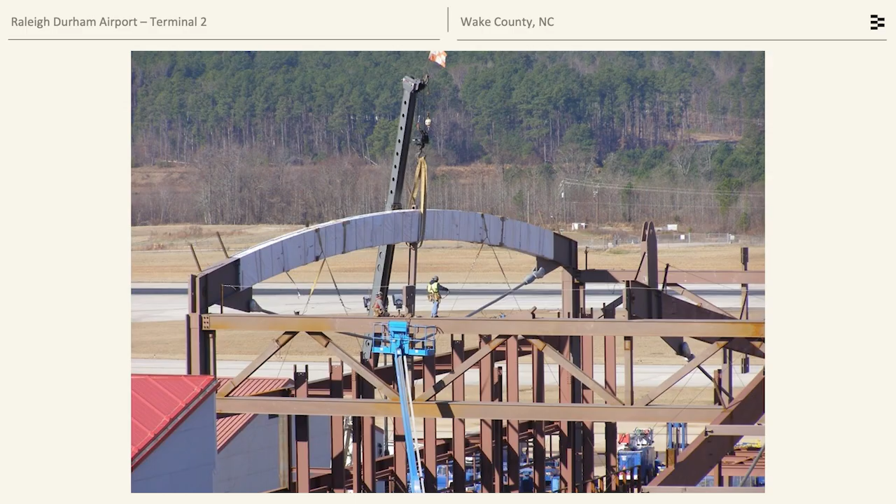Maybe. All right. Where the steel vertical post meets the glulams there, it's a very sensitive connection. A lot of different forces happening there. Really difficult connection to design. The engineer of record on this project had actually designed the whole thing, including the connections. That was their design on the left. It probably would have worked structurally, but would have been extremely difficult to fabricate and to install.

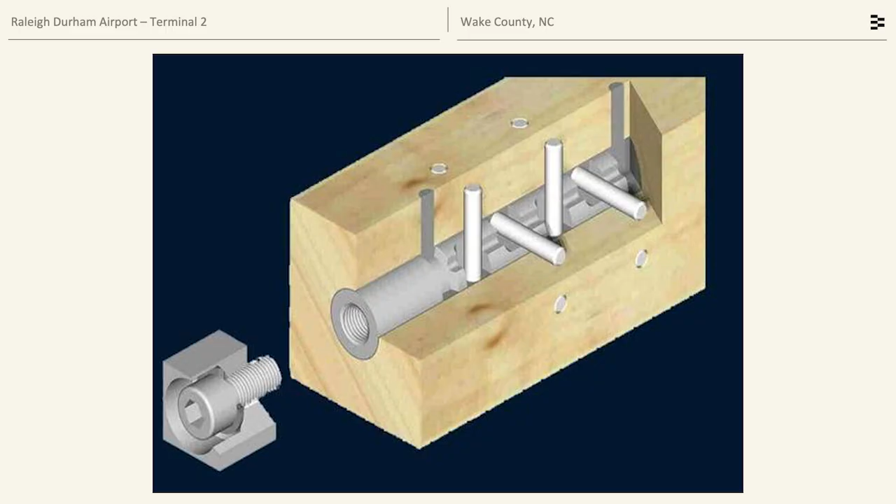And we got brought into this project as specialty engineers to help redesign these connections. We brought in technology from Europe, which was called the Bircha connector, and redesigned these connections with that. This product didn't have any approvals in the US, so we had to oversee a $200,000 testing program to prove that it worked. And after we did that, using these connectors, we saved $1.5 million on a $7 million timber package. So one thing to know about timber construction is there's a lot going on in these details, and there's a lot of opportunity to optimize these details and still develop something that totally meets the aesthetic goals of the project.

Adohi Hall is a university project. It's a residence hall at the University of Arkansas, 5 stories. And the importance of this project is that it really showed that mass timber can be built in the South competitively on cost.

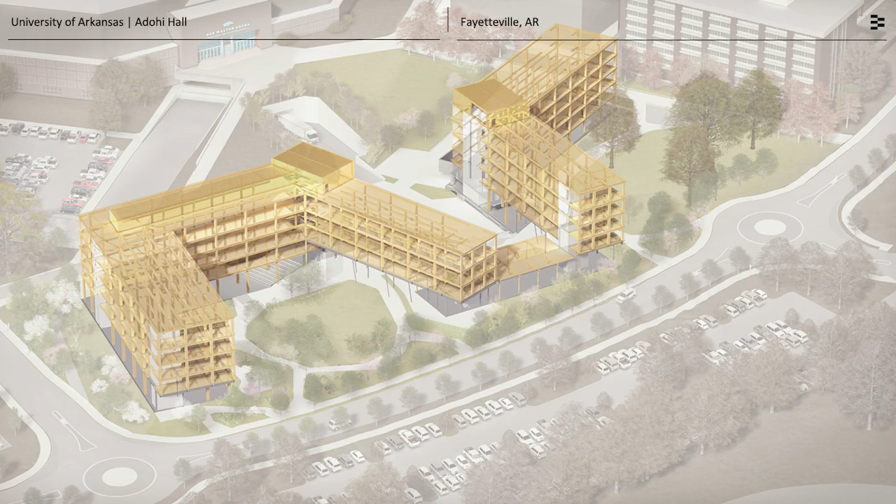This is actually in the, Laura, what's the name of that document? Business Case Studies for Mass Timber by Woodworks. This is one of the case studies. A very small premium to build this in mass timber as opposed to conventional materials, but they're getting something like 25% higher rent rates in this building.

And so it's a very simple post and beam building, glulam floors, and a little bit of expression here in the common spaces with these nice hybrid trusses. I think this project was completed about 2018 or 2019, so a relatively early one here in the scheme of things.

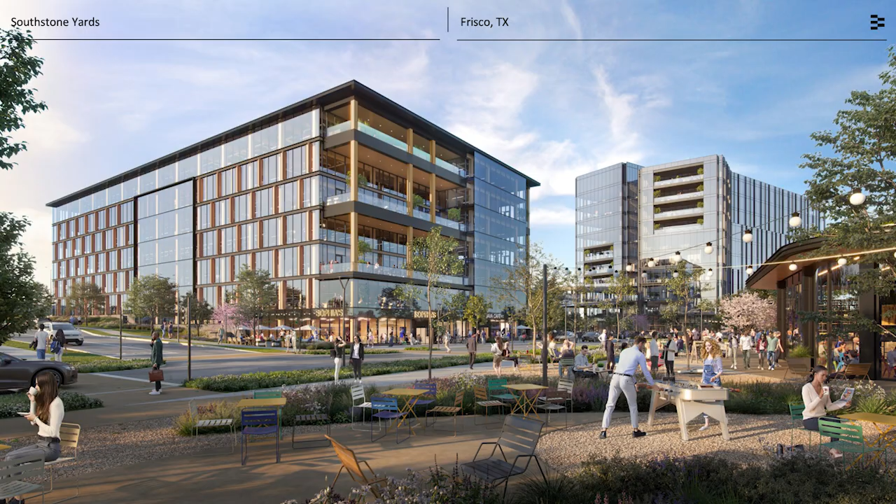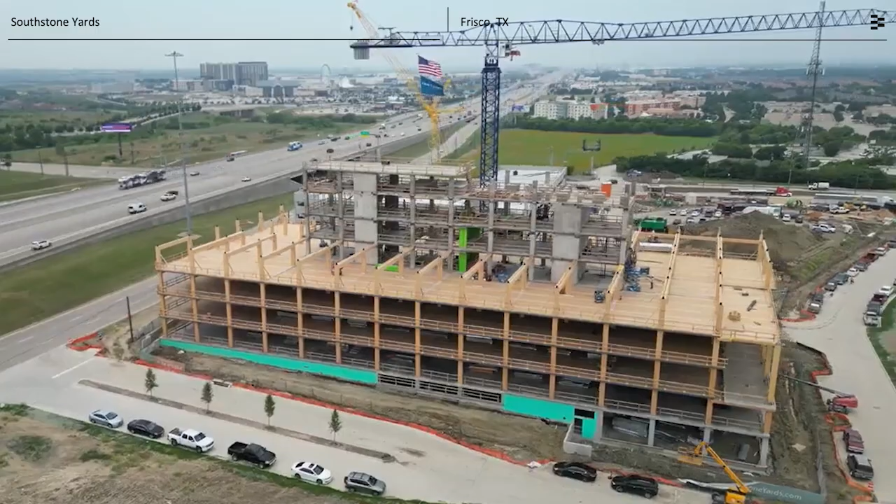Southstone Yards is a spec office building in Frisco, Texas. It's on a campus there. There's another building being designed now. This one was supplied by SmartLam, and we worked with them on the project. So it's a post and beam building. The framing layout in general is very similar to the T3 that's here in Atlantic Station. And you can see what that looks like here in this a little oversaturated photo, in my opinion.

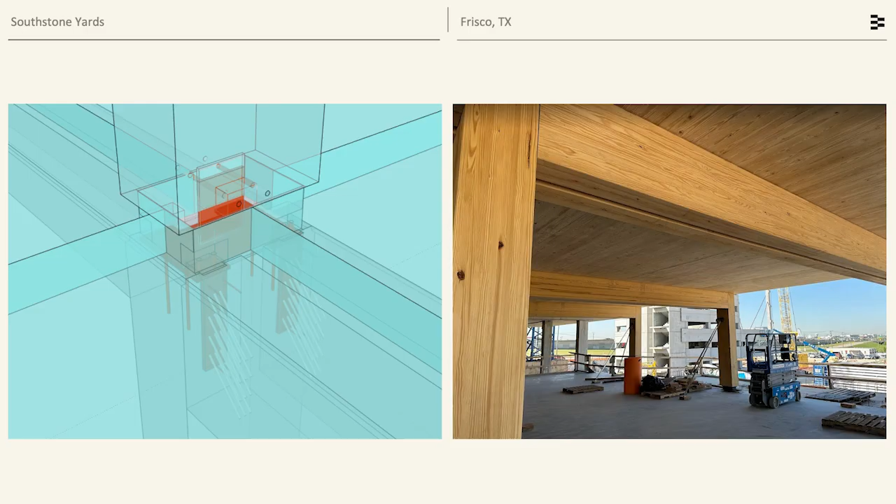Used Alaskan yellow cedar columns on the outside. It's important when you're putting timber on the outside of the building that you use appropriate detailing, use appropriate materials, consider pressure treating and so on. AYC is a great product because it's naturally rot resistant.

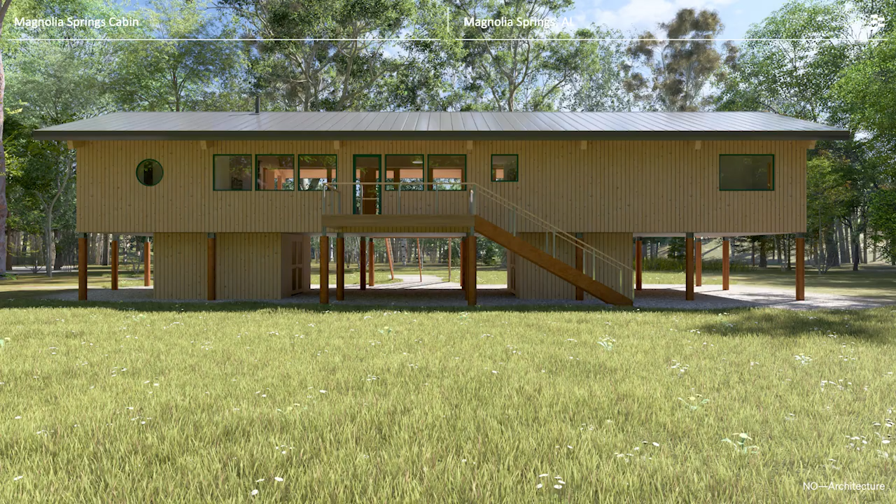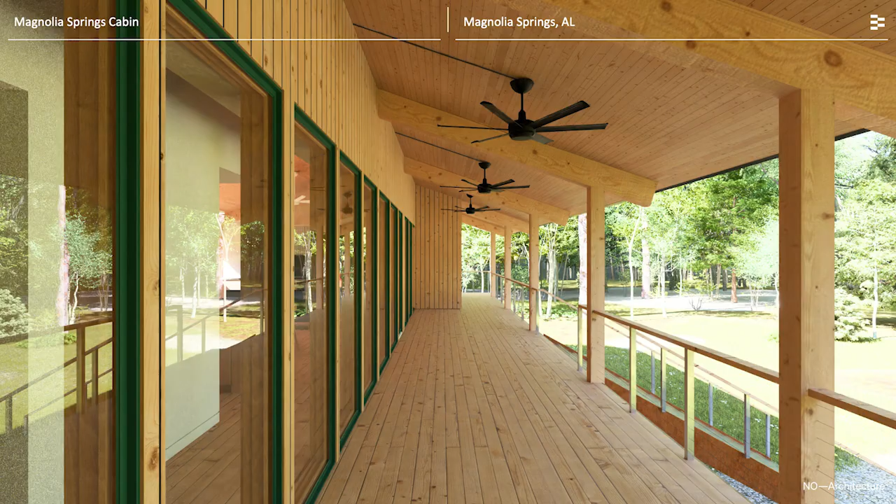So getting more and more current and perhaps a bit closer to home in Magnolia Springs. This is one that we're doing with No Architecture, who's here in the room today. It's a cabin, vacation home basically, and uses, again, pretty simple glulam post and beam frame, CLT roof deck, a conventional floor that's elevated for a couple of different reasons, but just a nice simple project, simply detailed, will be a little bit more expensive than probably if built conventionally, but obviously delivers a unique aesthetic that you can't get with conventional construction.

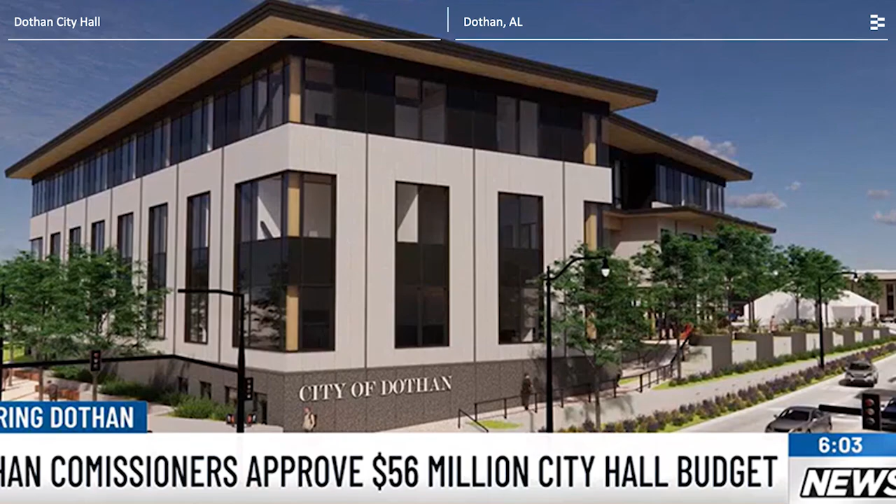Sticking in Alabama here for a second, Dothan City Hall. Of course, Dothan is the home of SmartLam here in the Southeast, so no surprise that we're working with SmartLam again on this one. I probably should have tried to find a better rendering, but I snipped this one from a local news report. And now we all know how much this thing costs. Anyway, 3-story mass timber City Hall, not so different in scale from the one in Brookhaven.

Our responsibility on this project was we designed all the CLT. You can see there's long cantilevers at the roof. There's a point-supported canopy as well. Designed all the connections for all the CLT and all the glulam. And this snip is taken from the cadwork model.

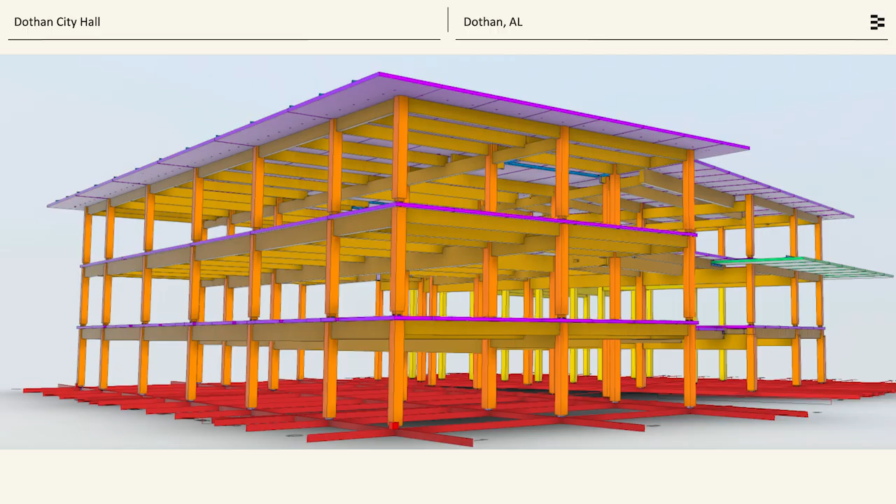So one important thing to know about modern mass timber is that it goes through a digital fabrication process, right? And this is really one thing that distinguishes it from the old school heavy timber, is that you build a fabrication model such as this one, and these models have everything in it. I mean, typically they will have every screw, everything down to millimeter precision.

And then this model is what's used and picked apart piece by piece in order to drive the fabrication equipment that will fabricate all these glulam beams, columns, and CLT panels. And this project just started production now in Dothan. So it'll be built next year.

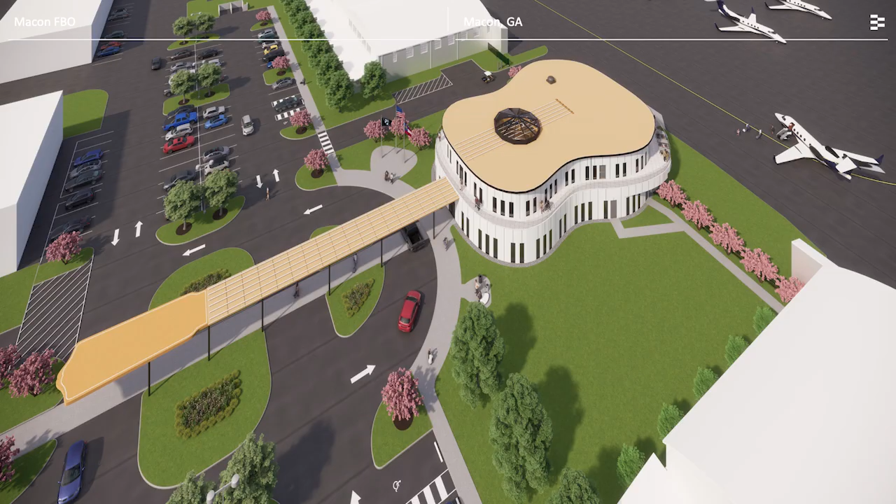The Macon FBO terminal. So I have learned since starting this project that Macon is the home of Otis Redding and also the home of the Allman Brothers. So a pretty significant musical history in Macon. As I understand it, this is basically the front door to Macon for people who are potentially going to come in and make investments there.

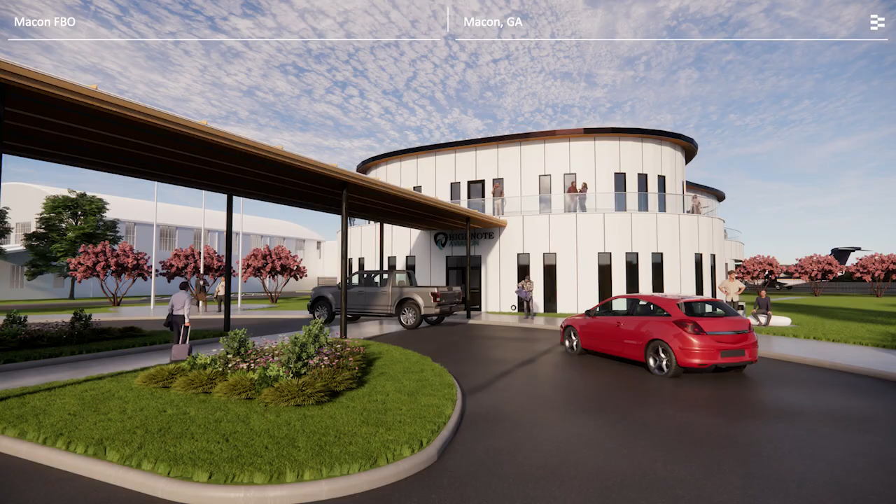It's a corporate airport terminal, so if you have some hotshot flying in that's going to build a new factory or set up a new business in the region, this is where they're going to come in. And the building that they had there was pretty aged and maybe not the best front door for your VIP type folks that are coming into town to make investments. So they wanted to build a new building in order to showcase their heritage a little bit, and they made it in the shape of a guitar.

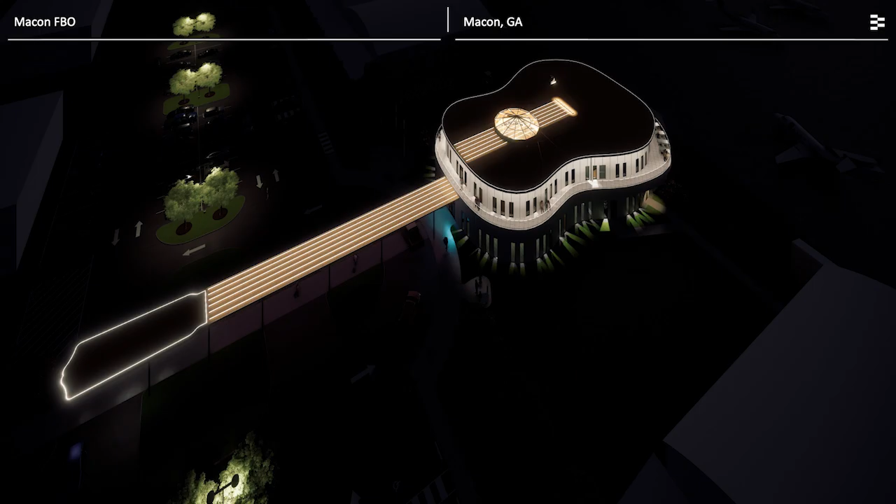And when I first saw this, I thought, no one's going to be able to tell it's a guitar. And they're like, Matt, it's at an airport. I said, oh, right. So it's going to be some really nice lighting, so you can see it at night. This project is in the early stages of construction now. It's not so dissimilar from Dothan City Hall in the timeline, probably in production now in Dothan.

I think one important thing about this project is, we all see all these mass timber buildings that are really nice boxes. And mass timber is not limited to being a big shoebox in form. It's definitely the most efficient way to do it, but you don't have to be limited to that. You can get creative. You can have curvaceous elements like these. You can see how we frame this here with these kind of radial beams.

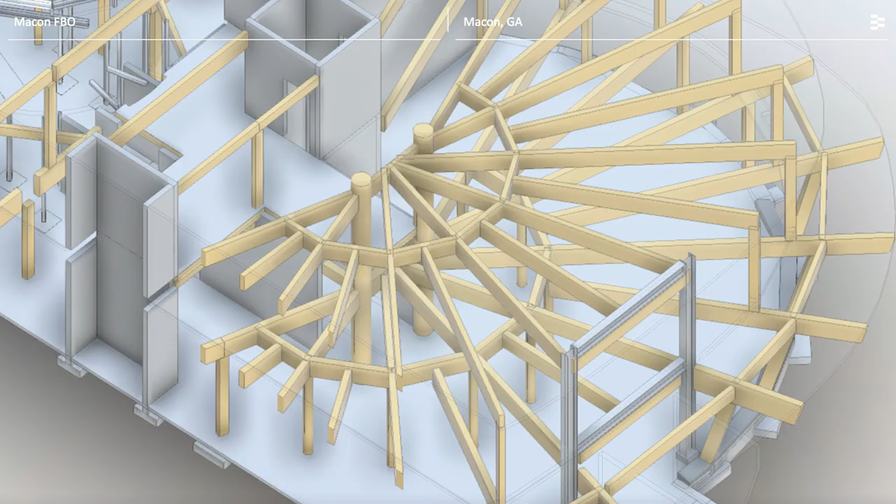And we also have one of my favorite terms, SRT, structural round timber. Sounds really wild. These are logs. And that's what these two big circular columns are here in the middle. Locally sourced, of course. One of the little strategies that we used on this project was, actually I might step back here a couple slides if I can.

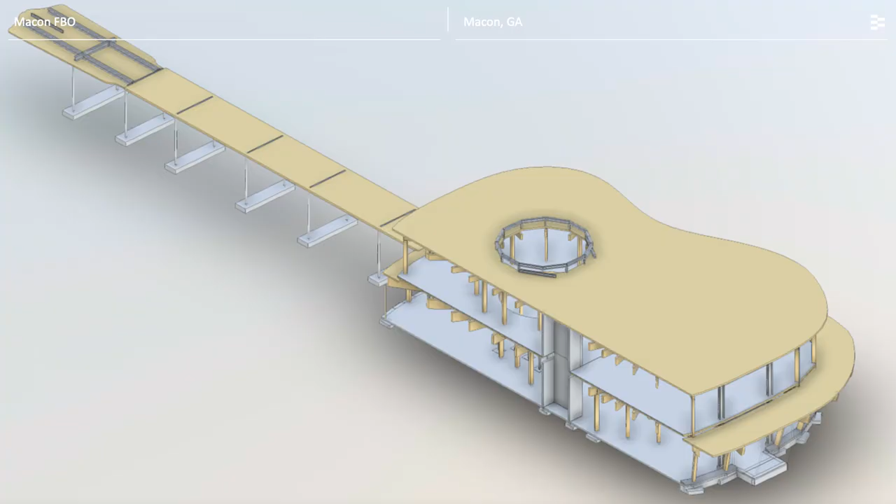Okay. You can see there's a balcony in this cutaway view that wraps around the entire building. We wanted to use the same framing from inside to out. There's a structural step when you go from inside the building to out on the balcony. So what we did was we dropped all the beams and then we put spacers on top of the beams to support the CLT within the envelope. And aside from enabling us to then use the same element inside and out, what that did is it allows us a space to run our building services.

So you don't see any in this image, but you can see how that beam is dropped. It's kind of nice to have the lowest thing, kind of your ceiling that you're really looking at, be a glulam beam and not be a mechanical duct or a run of low voltage cable. So a nice strategy that had kind of two benefits here on this project. This is one key thing about designing a mass timber building is you are not just showing off the structure. You're going to be showing off everything that's up on that ceiling. And so you need to find ways to integrate that in a way that is appropriate for the budget, but also gives you the aesthetic that you're looking for.

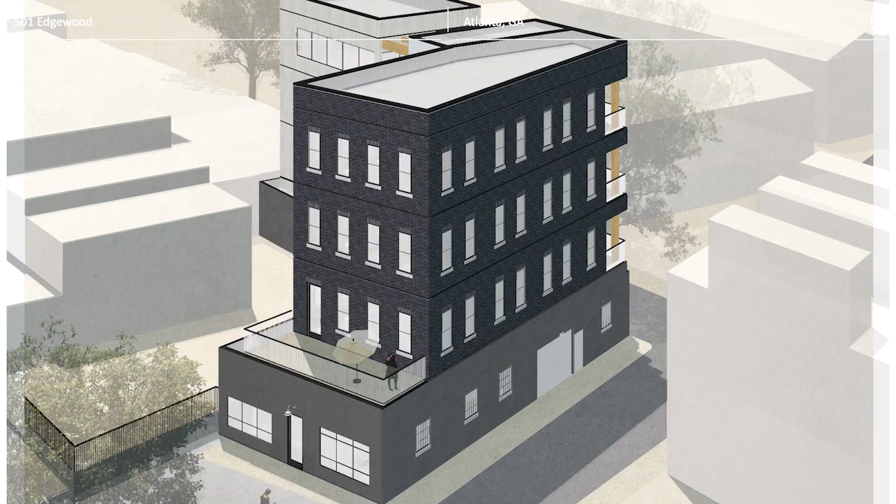Now in Atlanta, this is the project that's up over here by NO Architecture. Got started on this one with these guys. It is a 3-story vertical expansion of what is currently a 1-story block building on Edgewood Ave. It's going to be residential up in these 3-story portions, I think 4 different residences, if I remember correctly. And the idea is to save the building on the first floor and basically do a surgical insertion of the vertical structure that will drop through what is currently the roof. Hopefully stage the construction to keep the coffee shop, which is a neighborhood icon there, I think, operational.

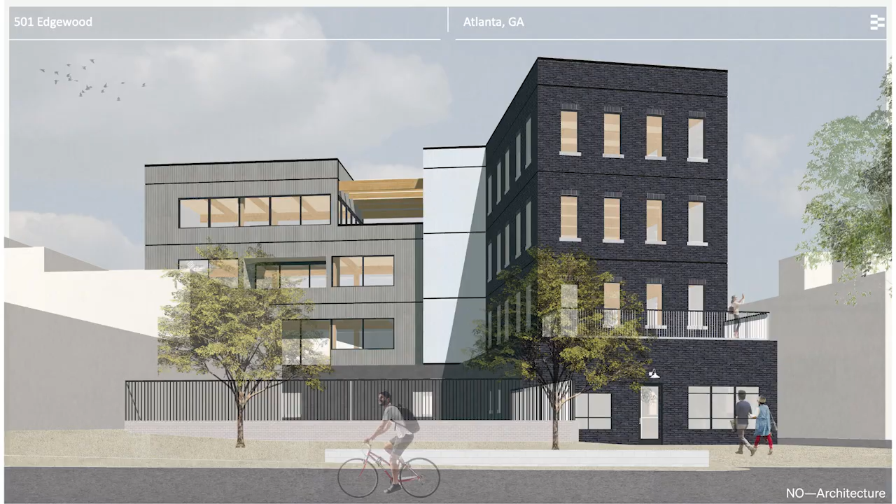And again, it's a pretty simple mass timber frame with some other elements there for lateral support. And that is one of the accelerator grant recipients that was part of the ceremony yesterday. This is one that's an accelerator grant recipient for this year.

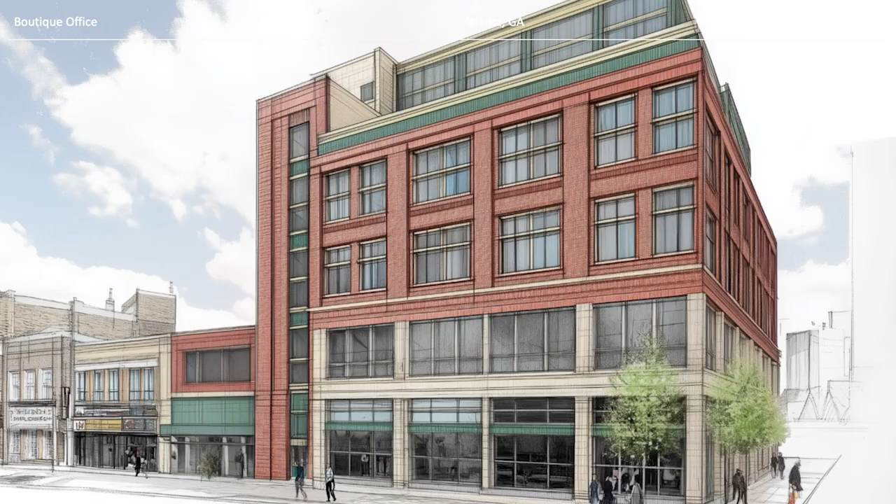This project is in downtown Atlanta on a pretty small, by today's standards, site. I think we have about an 8,000 square foot floor plate. We're going to go about 5 stories with a boutique mass timber office building there. It's in a pretty historic part of town, and so the idea is to essentially make it blend in to the existing building stock there. It's kind of a new approach to what they have, right?

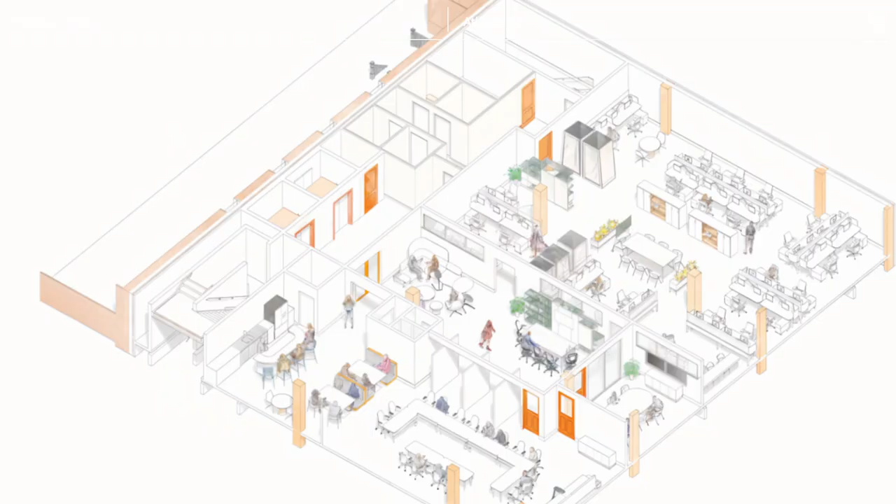But I expect universities are going to keep carrying that torch. Clemson, I would say, is now a timber-first university when they're looking at building on their campus. Auburn is starting to get that way as well. Tech here is certainly interested, but maybe a couple steps behind those other two, and I think gonna catch up.

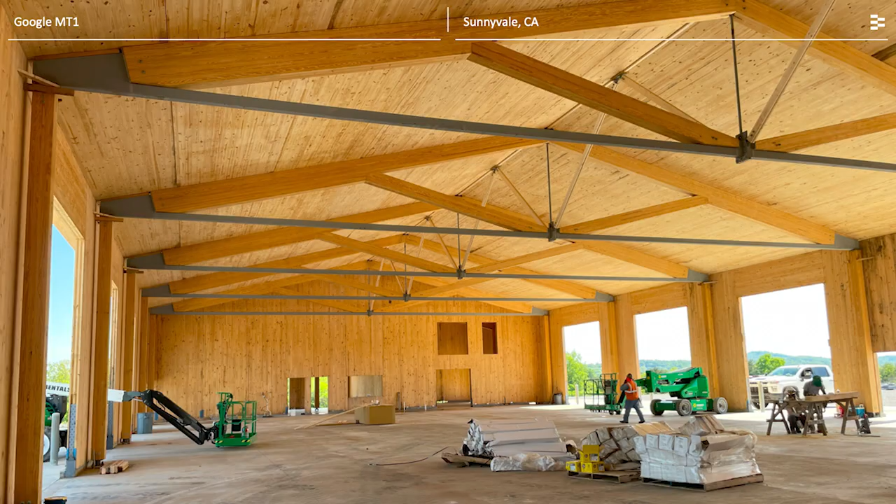I'm not going to stand here and tell you guys something that's not true. This is a more expensive way to build what is a trucking terminal here. There's no cheaper way to enclose a space than a pre-engineered metal building. However, wouldn't you rather work here than in a pre-engineered metal building? It's a really nice space.

The last thing is going taller, and I think Laura will probably speak a little bit more to this after I go here, but there is this code change that's coming here in Georgia on January 1st, which is that in Type IV-B buildings, you're now going to be able to expose 100% of the mass timber surfaces in those spaces. And this is a really key change because it opens up this space, this kind of height in the marketplace where timber is not competing so much against other materials. And so it's like Too Short taught us, you got to get in where you fit in when it comes to mass timber here.

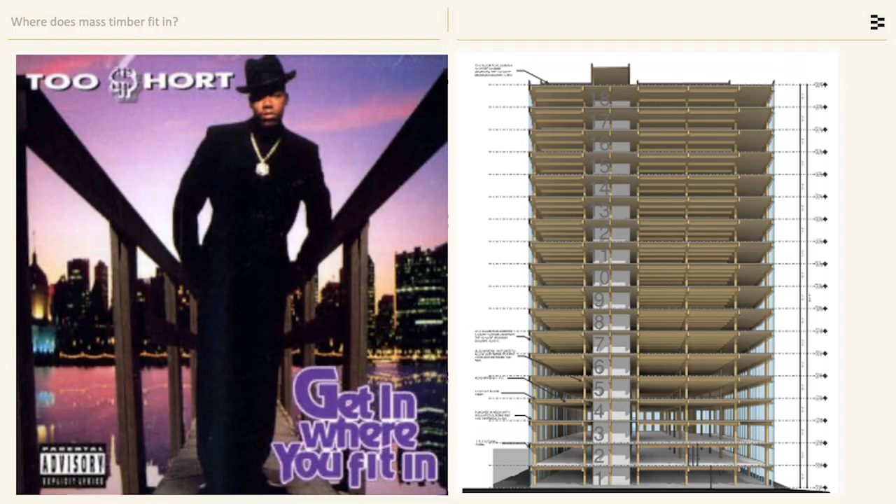So for multifamily residential, which is what we're seeing being built tall in timber, at low construction heights, you're generally competing against stick framing. Very hard to compete against stick framing, at least on a cost basis. The sweet spot, this is where we get in with mass timber, is in this range where you're above where you're competing with stick frame, but you're below where concrete is really efficient, right? Because concrete relies on rinse and repeat up and up and up.

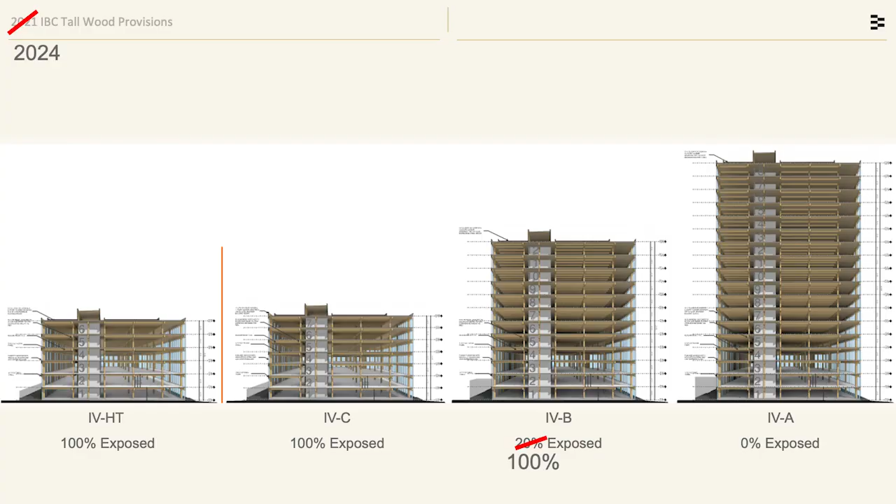So in this kind of 8 to 12 story range, I think is where we're going to see a lot more mass timber construction. And, spoiler alert, we are seeing a lot more mass timber construction in this range. And even above this range, if you can get a variance from the authority having jurisdiction to go taller, but allow some of that timber to remain exposed. So stay tuned for some upcoming projects in and around Atlanta that might be fitting what we're looking at here.

I gotta tell you guys, I nailed it. There's 10 seconds left on this counter.